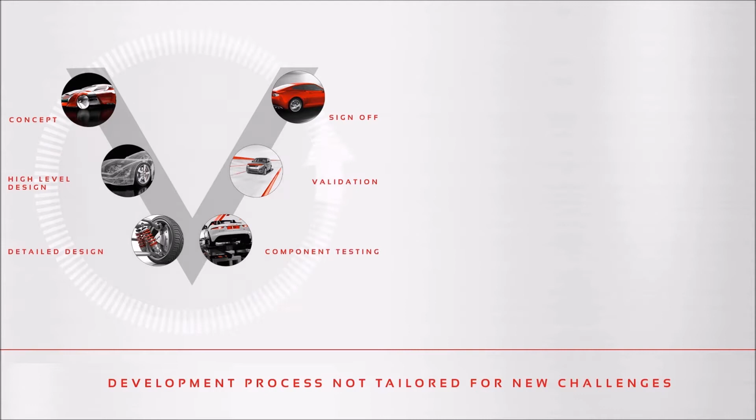This process is quicker, simpler, and safer, and our customers tell us that not only do they realize the expected financial return on investment, but in fact, the simulator has become a collaboration platform that unites their teams and enables design breakthroughs. For many years, the automotive industry has relied on this traditional V-shaped development process where you start on the left-hand side and you cascade design targets from a system down to subsystems and components, and on the right-hand side, then you validate and verify performance from components back up to the full vehicle. But this process isn't well tailored to modern challenges where we have highly complex interrelated subsystems like we do for ADAS. This process is too slow, too cumbersome, and much too expensive for these types of modern challenges.

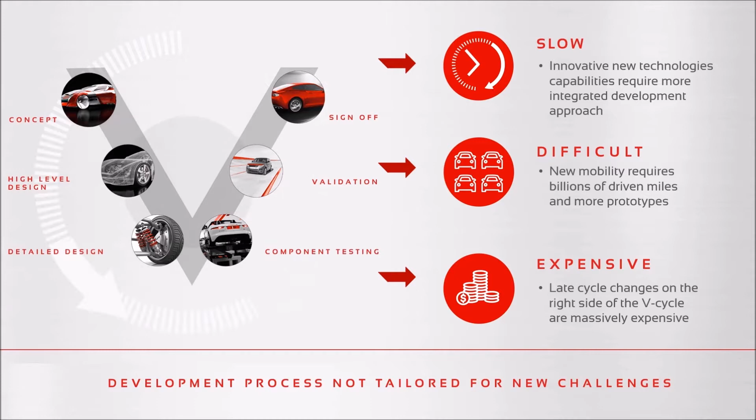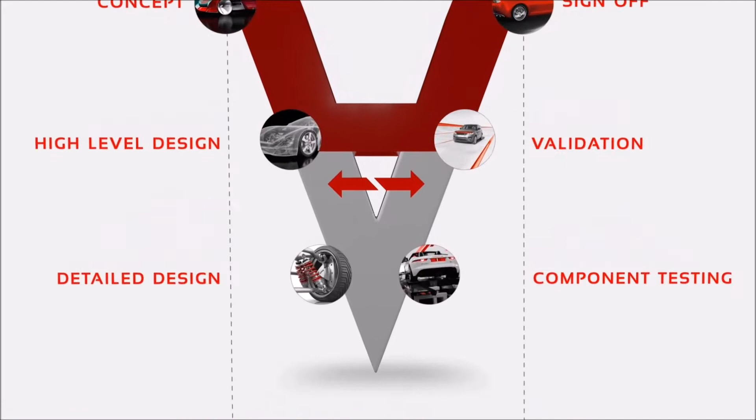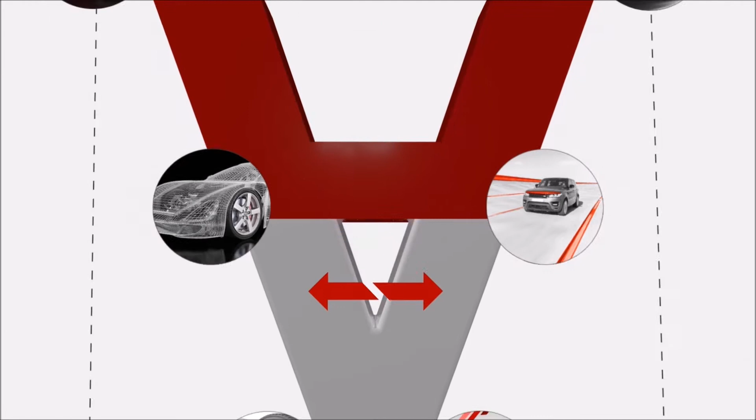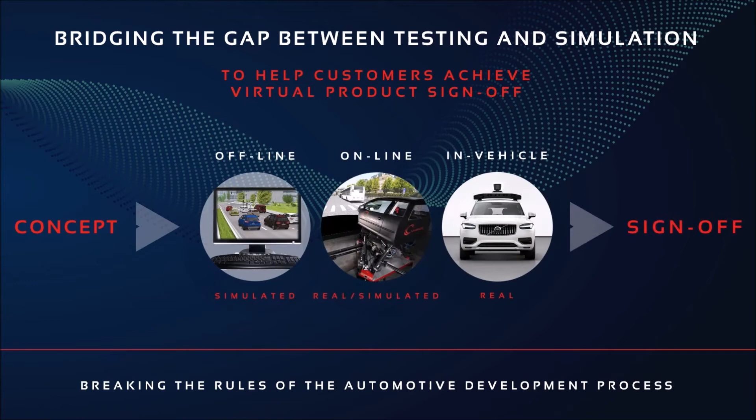Instead, we've introduced this immersive driver-in-the-loop simulation technology that allows an engineer to physically drive the virtual prototype from the earliest stages of the design process, even before components are designed or selected. By doing this, we've united the work of the CAE engineer and the test engineer and significantly shortened the time that it takes to get the virtual sign-off. The ability to move directly from concepts to offline simulation and then into real-time driver-in-the-loop simulators enables us to bridge the gap between test and simulation and deliver faster innovation.

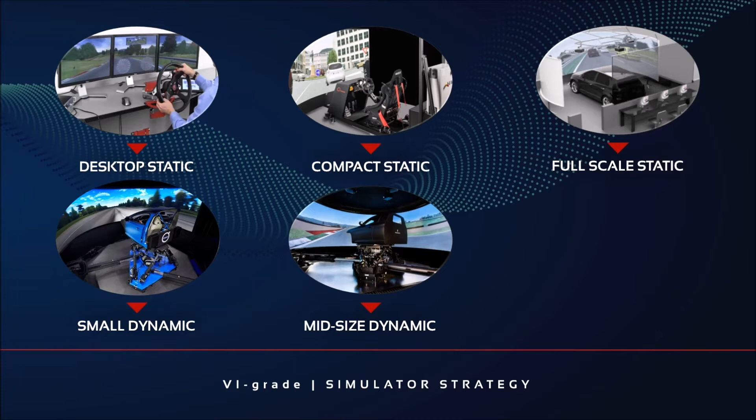As many of you have seen up till now, we've delivered a pretty extensive line of vehicle simulators ranging from simple desktop static solutions all the way up to our mid-range DIM 250 dynamic simulator. But our customers continue to ask for more. They want larger workspaces, higher dynamic performance, greater yaw and heave, and deeper immersion. And so we've broken the barriers of the previous 150 and 250 based on actuator technology and created a new line of cable-driven simulators that allow us to scale to nearly any size, from 4 meters of lateral and longitudinal travel all the way up to 15 meters and beyond. Today we'll show you the DIM 400.

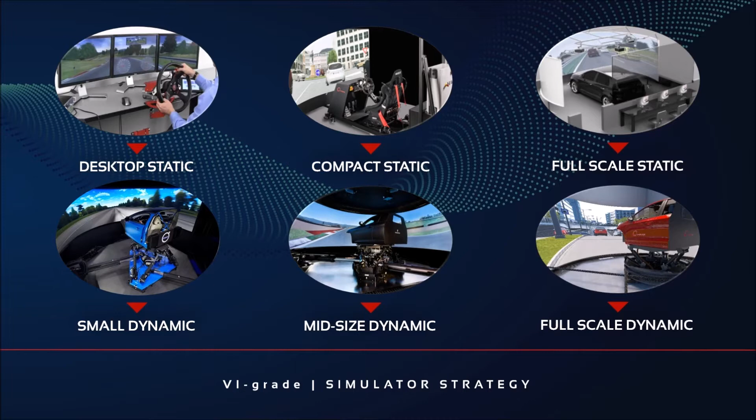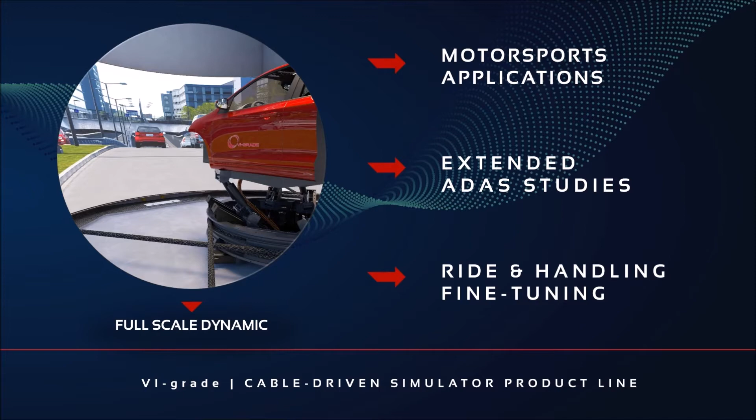The new line of full-scale simulators offers a much larger range of price and performance points. They allow us to perfectly address motorsports applications, extended ADAS studies, and fine-tuning of ride and handling for passenger vehicles. Even though this new line of cable-driven simulators is built on radically advanced technology, all models still share the same attractive features that you've come to expect from VI-grade simulators. That is, they're delivered as a turnkey solution with a complete software workflow. Secondly, they leverage our unique architecture where we isolate the lower stage motion from the upper stage motion so we can faithfully reproduce both low frequency and high frequency behavior.

And lastly, we deliver an open real-time architecture enabling you to add your favorite third-party hardware and software solutions and have them work flawlessly. Now let's take a look at this new simulator product line, and then later the innovative new software that we're delivering with it.

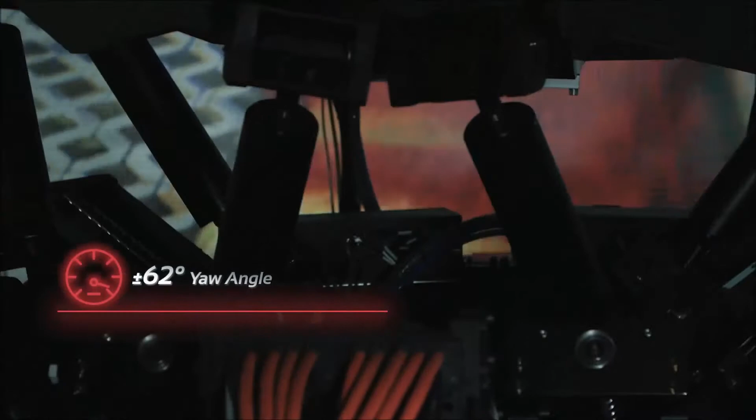Finally, the wait is over. We have now revealed VI-grade's brand new family of scalable, cable-driven driving simulators. My name is Mark Westerway. I am a driving simulator specialist located at SimCenter Udine, and I will be moderating the remaining part of this event on behalf of the whole VI-grade team.

Let's now have a closer look at how our cable-driven simulator is made, taking as an example the DiM 400, the first model of VI-grade's cable-driven simulators, which is now operational at SimCenter Udine.

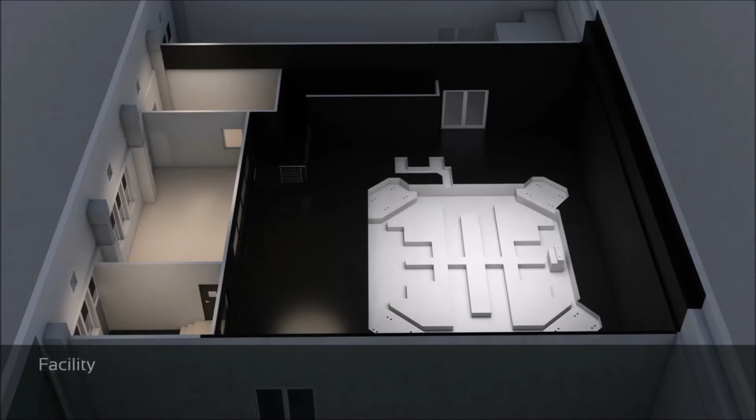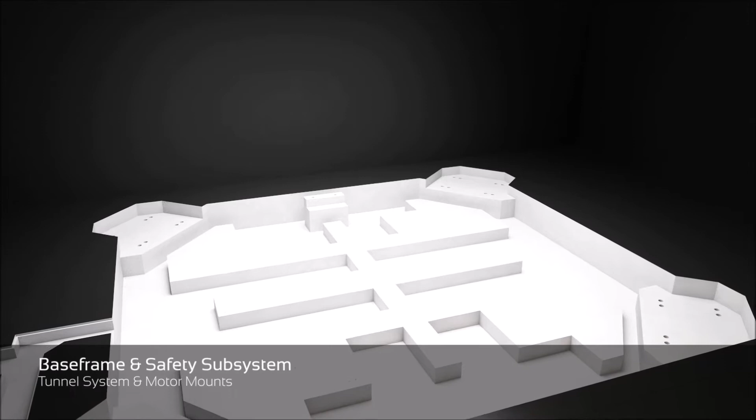As all driving simulator centers, our sim center features a control room and meeting room next to it. At the bottom of the installation, you can see the base frame that comes in two pieces, on which air pads are sliding smoothly. A multi-layer safety system is in place to ensure that the platform does not exceed the workspace.

Now let's start to analyze in more detail the machine that has been developed in collaboration with Rebel Dynamics. First, there are 3 air pad boxes. These are housed inside the lower part of the motion platform called the disc frame, around which the cables are wrapped.

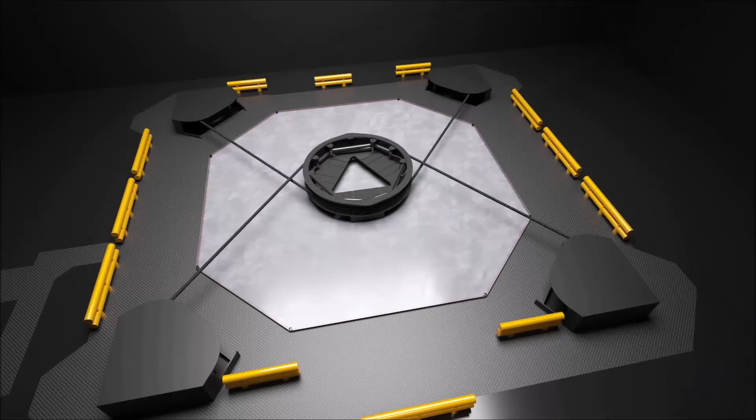The disc frame has 3 degrees of freedom: longitudinal, lateral, and yaw. These 3 degrees of freedom give the disc frame the ability to exploit at best all the available workspace.

And now let's see one of the special components of the cable-driven simulators, the inertia compensation system. The system makes our cable-driven simulators the first active simulator in the world, featuring a real separation of low and high frequencies. Through the motion of 3 calibrated masses, all vibration coming from the upper part is damped out and therefore not transferred to the lower stage.

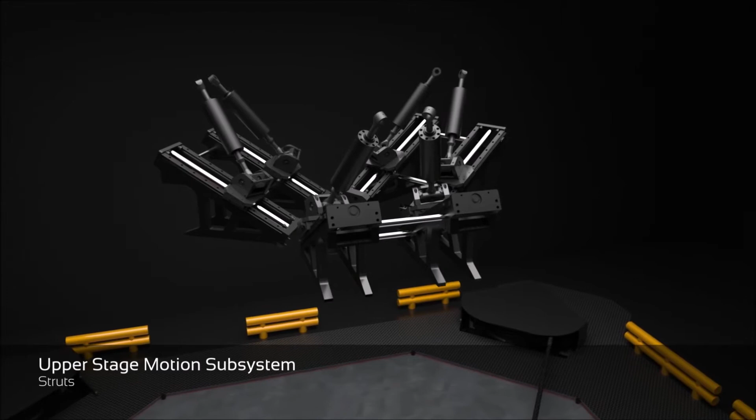On top of the disc frame, we find the hexapod that delivers the additional 6 degrees of freedom and is characterized by top-class heave displacement and high-frequency motions in all directions. Let's have a closer look at the motions in all 6 directions.

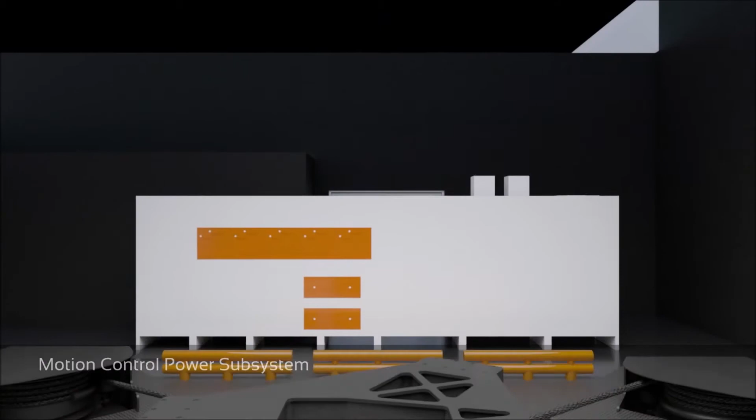All VI-grade dynamic driving simulators are equipped with a realistic cockpit obtained from a real car. This increases dramatically the realism of the driver experience. Standard components are touchscreen, shifter, steering system and dashboard,

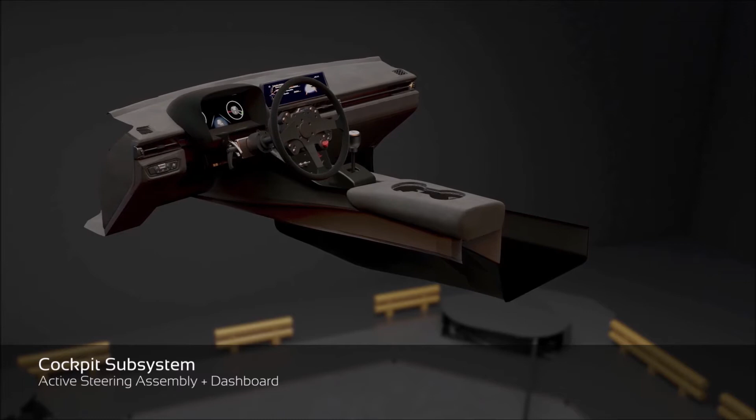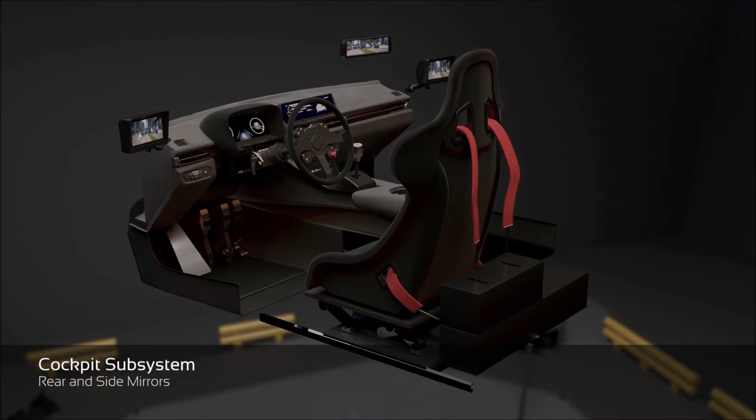active brake and pedals, active seat and belt, mirrors, eye tracking camera, speakers, and car body with carbon fiber components and shakers.

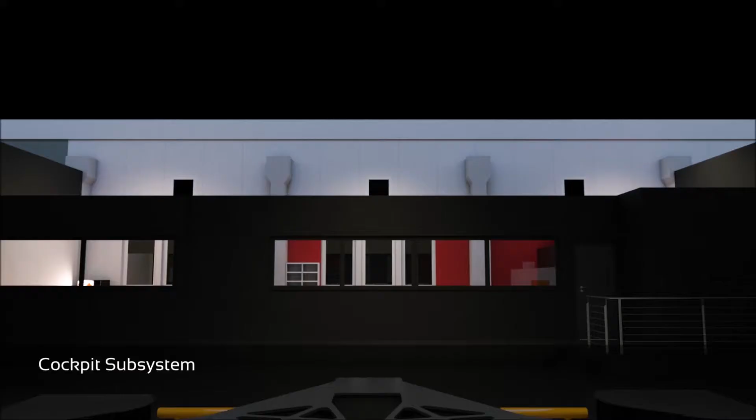All this can be easily mounted on top of the hexapod with a plug-and-play interface.

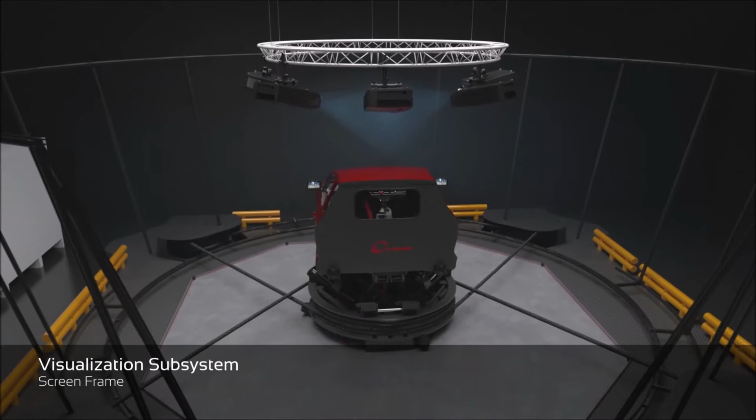Total immersion is guaranteed by a top-class visualization system using high-frequency projectors and a wide conical screen.

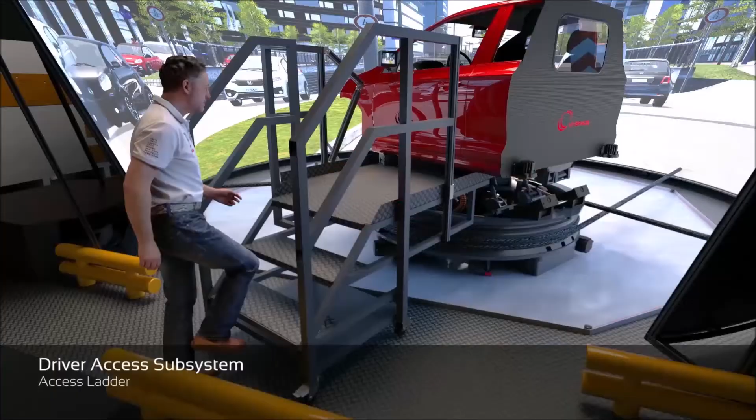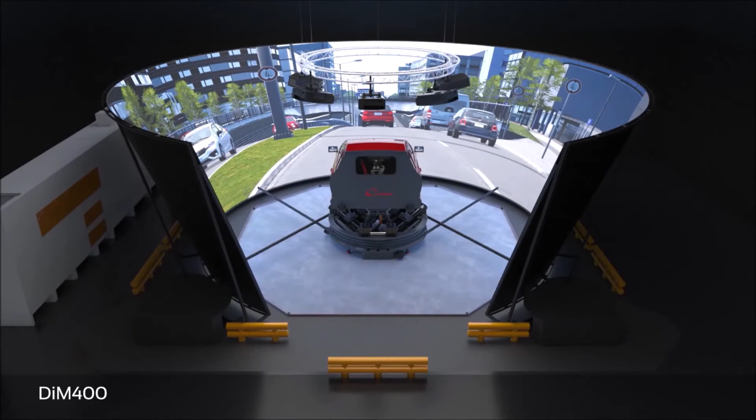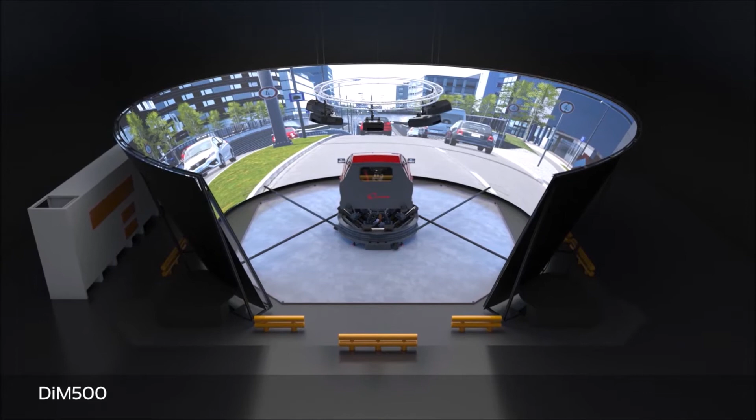As you have seen, our DiM400 features everything you need for an unprecedented driving experience. But there's more to it, since our cable-driven simulators can easily adapt to client-specific budgetary and space requirements. They can be built in any size, ranging from 4 meters of lateral and longitudinal travel up to 15 meters and beyond.

Up to 5 meters of lateral and longitudinal travel, cable-driven simulators come with a fixed screen. Above that value, the fixed screen is replaced by a dome or other visualization equipment, such as VR headsets. VI-grade cable-driven simulators are the first simulators that adapt to your needs, and not vice versa.

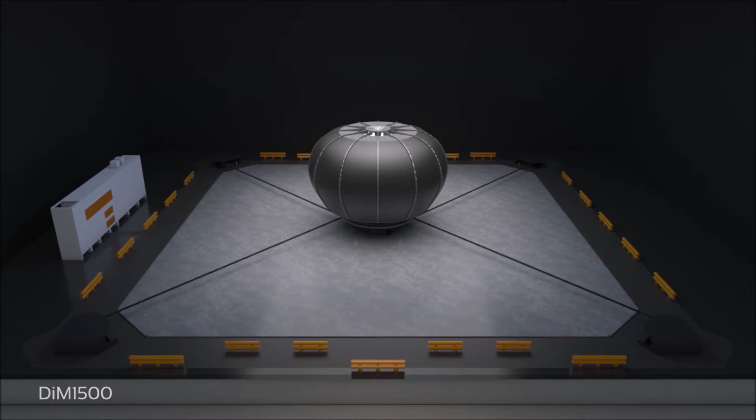And now, let's discover how our cable-driven simulator product line has been conceived and developed through the words of its creator, Diego Minen, CTO of VI-grade.

It was back in 2015 when we were looking for the simplest mechanical element to move a frictionless disc on a flat surface. We had a few years' experience with actuator-driven simulators, and we wanted to expand our portfolio for more applications. It turned out that in order to move consistently and simultaneously along the longitudinal, lateral, as well as rotate around the vertical axis, 4 cables wrapped around 4 winches are needed. This subsystem, called the disc frame, represents an absolute innovation in the driving simulator engineering.

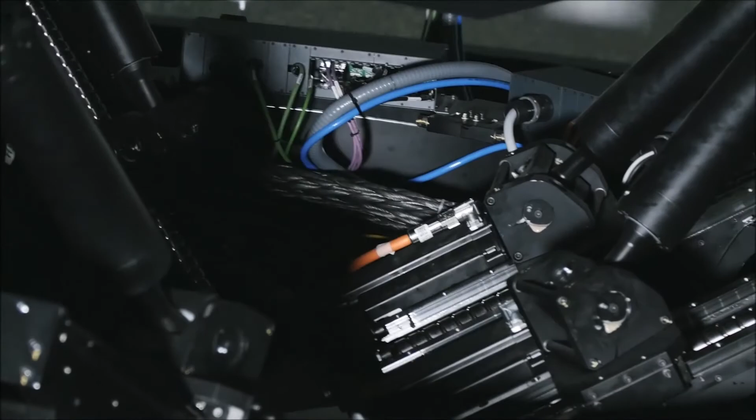We have indeed a new innovative subsystem for 3D motion as well. We call it Hexalift, mounted on the disc frame and meant to capture mainly the primary chassis body motion in the vertical plane.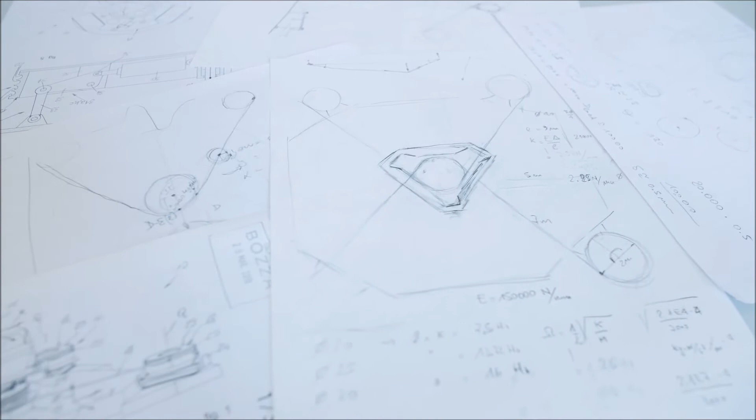After the initial by-hand sketches, the most important thing for us at VI-grade was to make sure that the mechanical system and the control system could work together. Thanks to our multi-year experience in mechanical simulation, we massively use Adams, which is the most known mechanical simulation software in its field, to simulate the simulator.

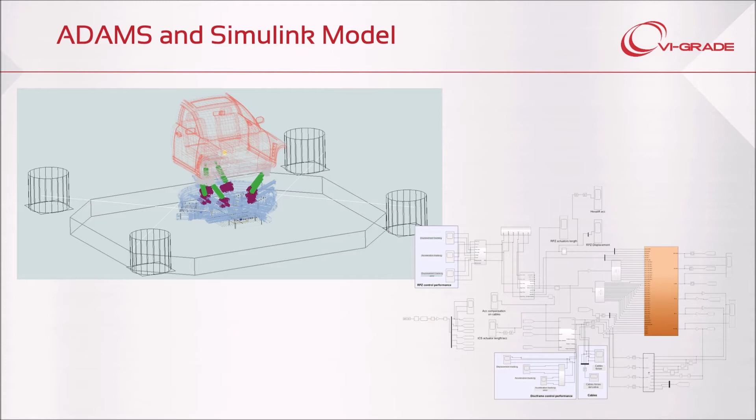MATLAB Simulink also has been used intensively to do co-simulation with Adams for the control part development. One of the things that surprised us the most was that the setup of the parameters for the control part was used almost the same for the real machine, and this shows the goodness of the work done in the virtual world.

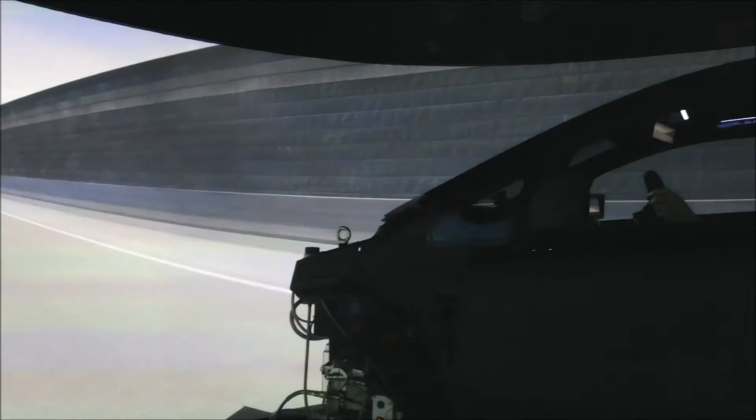Clearly nobody knew that the system was going to work. Nothing like that is, to our knowledge, present in the world. We put together a heterogeneous team made of mechanical, structural, cableway, marine, electrical and electronic engineers. We relied on mechatronics and robotics as a backbone, and on driver perception experience as a beacon, during the entire development. Driving simulators require in general a very multidisciplinary approach.

We had in mind not only to design a prototype by itself, but rather to invent a new cable class simulator concept. The nature of cable allows the system to be adapted for any user requirement, both functional and logistical.

The cable-driven simulator is designed with perception in mind, just like all other VI-grade simulators. In particular, we have 2 stages of motion: one for low frequency and big displacement, X, Y, and yaw, and another one for high frequency and small displacement, like X, Y, yaw, as well as for low and high frequency roll, pitch, and Z. The associated inertia of each stage is inversely proportional to the frequency they've been designed for.

Moreover, cable-driven has an independent combination of X, Y, and yaw, meaning that there is no limitation for the motion independency of each of these axes, and only a slight dependency of the Z travel on the other directions. Those characteristics allow for very adaptive motion cueing settings, fundamentally for any truck, any car, and any driver, and this accelerates dramatically the tuning process.

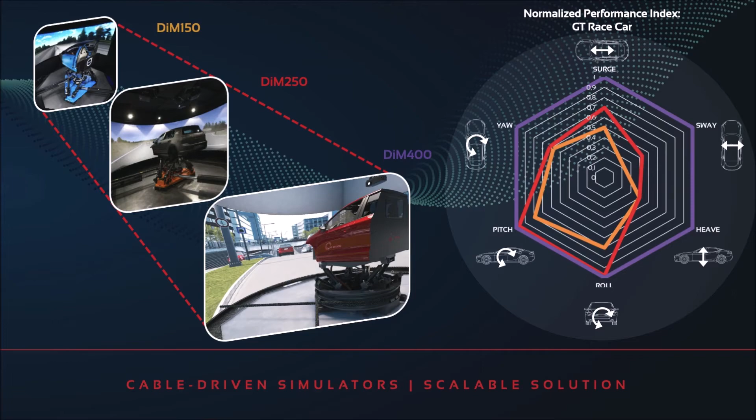This type of simulator does not require extreme precision for installation due to the nature of cable, and this would go together with clearly huge stiffness, high inertia, and extremely high power requirement. Most of the machines similar in terms of workspace have high frequency motion vibration from simulated contact and actuator dynamics, and these are transmitted undamped through the whole kinematic chain and obviously bounce back very unrealistically to the cockpit.

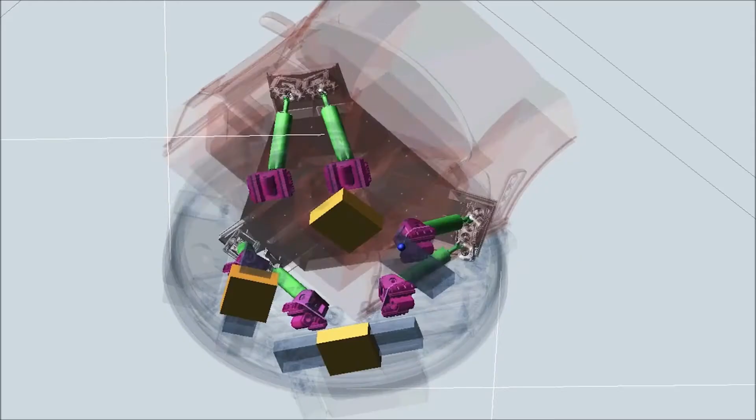It cannot be summarized precisely in a bullet point, but the cable-driven simulator is passively overdamped for planar motion, of course due to the polyethylene cable, and is actively damped for the high frequency generated by hexapod motion. A special subsystem called the inertia compensation system acts as a source for vibration cancellation for any potential undesired cable oscillation.

It turns out that thanks to the inertia compensation system, it is possible to optimize the simulator performance on the two stages harmonization in a spectacular way, tuning it depending on payload inertia.

Thanks to Diego Minen, we have gained a unique understanding of the main capabilities of our brand new cable-driven simulators. Let's now experience how they perform through the words of professional racing driver Marco Bonanomi.

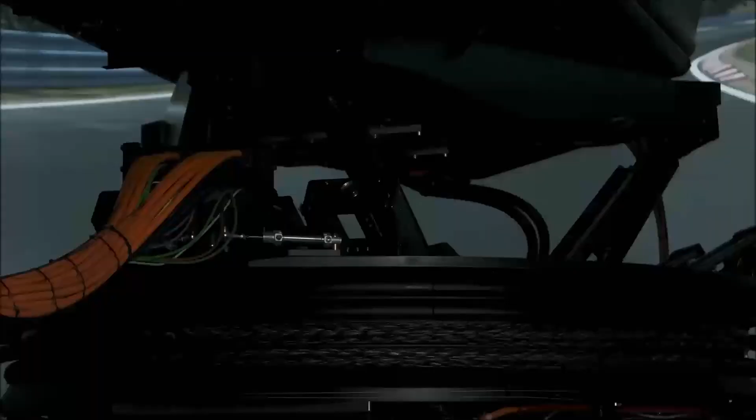Wow, just another level.

Well, first impression is just wow. It's just an amazing feeling, and I have to say it's a really big step up compared to the previous models, because right now with this platform we can produce much more movement and faster, so it's just great, and for sure it will help to develop in an easier and faster way all the products, or the machine.

Well, the gap for sure is getting closer and closer, and especially after driving this great platform, I can confirm that, and you can see also in the general situation with all the factories that they always invest more and more in simulation, because of course it's a big investment at the beginning, but then you can produce closer data and testing. You can test much more compared to reality, of course, and you can validate so many things that in reality you'd have to wait maybe a year for.

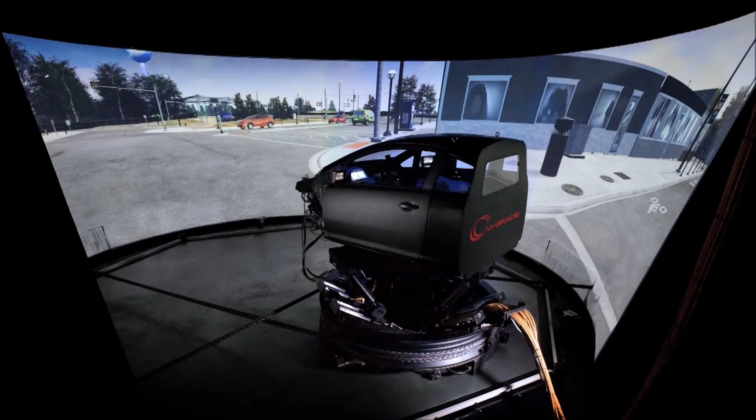Until now, we have seen how much care and attention VI-grade is putting into R&D activities to provide the most sophisticated and realistic driving simulators. VI-grade clients are always looking for solutions that allow them to develop innovative products in less time and with less risk, and this is our main driver for R&D activities.

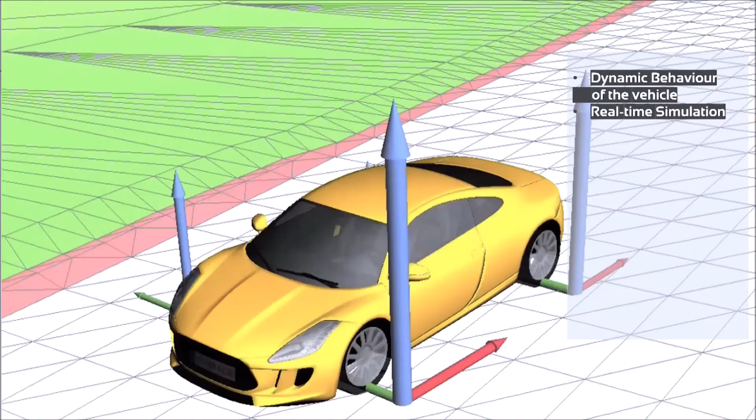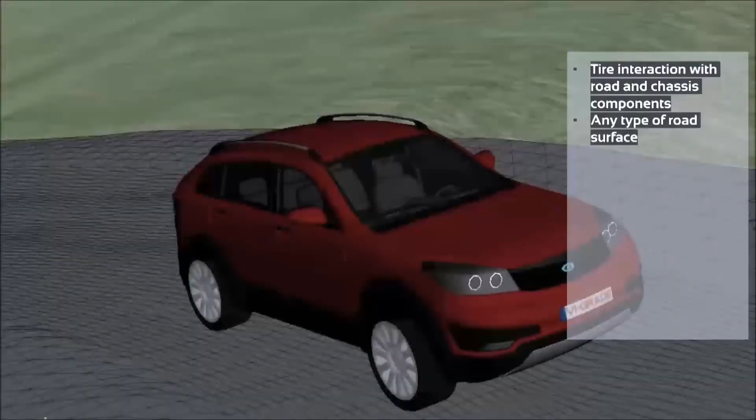When it comes to driving simulators, we have to always remember that these machines are a well-balanced mix of hardware and software. To deliver a realistic experience to the driver, a driving simulator requires a software stack that provides reliable information on how the vehicle behaves, how tires interact both with road and chassis, and how the external environment is defined and rendered.

In motorsport, being able to train on a circuit and try various setups before a race is key for success. Testing is limited and very often banned. Even when there are track tests, testing can be difficult to carry out. Therefore, having the right representation of track models on the simulator is very important.

In chassis development, being able to fine-tune suspensions, tires, and other components on different virtual proving grounds is very powerful to decrease time to market and to front-load problems and develop innovative products. Today, ride and handling development is done mainly on the driving simulator before building the first physical prototype.

In ADAS and autonomous vehicle development, it's all about perception, prediction, and planning. Public road driving has exposed all the challenges of testing ADAS and autonomous vehicles. Therefore, being able to test on a simulator with a high-definition environment is vital to develop, test, and verify these systems safely.

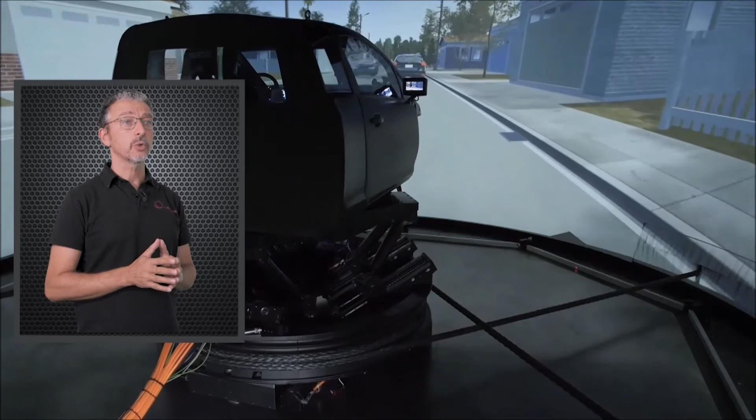For this reason, today we are introducing a brand new graphic environment that, from now on, can be used on all VI-grade driving simulators. It's time to introduce VI-WorldSim, a high-resolution graphic environment for accelerated vehicle development.

VI-WorldSim gives the possibility to drive a vehicle on a driving simulator in a high-resolution replica of the world with realistic traffic behavior. This new graphic environment is fully integrated with VI-DriveSim, easy to use, giving you the ability to build rich, realistic, and interactive scenarios without any programming knowledge, and highly realistic as it is based on a real graphic engine. VI-WorldSim gives you the freedom to define any type of environment.

Racetracks for vehicle development and driver training, CAV test sites for ADAS and autonomous vehicle development, testing and verification, and public roads for replicating real-life scenarios. And then it's possible to add traffic, pedestrians, lighting conditions, weather conditions like sun, rain and fog, and sensors. All this makes it possible for you to simulate your scenarios in any driving simulator.

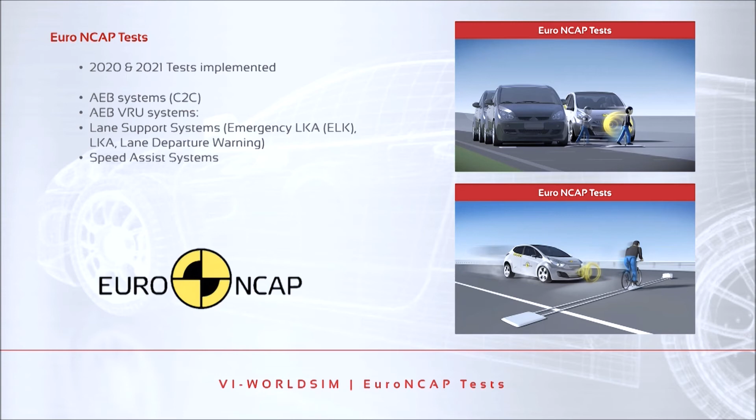If ADAS is your focus, then VI-WorldSim also comes equipped with the latest Euro NCAP 2021 test, already pre-configured and saved in a library for you. Just click on the test you want to perform and go.

VI-WorldSim gives our users one single graphic software for all different types of environments, all different types of simulations, all different types of disciplines. For more information, please visit our website and the dedicated webpage vi-grade.com/WorldSim.